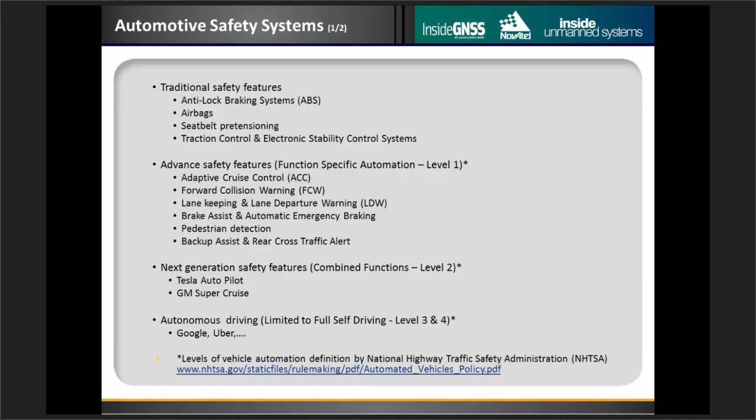And then, of course, we have other autonomous driving tests and development programs going on, like Google, Uber, and these are more limited or fully self-driving automation features, or level 3 and 4. And you will hear about these in more detail later in the presentation today.

So the other aspect I want to touch upon for safety is there's convenience and safety applications that are connectivity based. So examples would be GM OnStar, Ford Sync, Toyota Safety Connect, and then Chrysler Uconnect, and pretty much all the OEMs out there have a connectivity based solution, safety and a convenience application. These are basically location-aware connectivity applications. So they have a GNSS receiver that will bring in position and time, and then of course cellular for connectivity, as well as a backup source for time.

And typically these systems integrate different sensors in the car. And in terms of applications that we see in these, there's standard navigation, diagnostic, prognostic functions, and maintenance functions, concierge services, and more importantly, emergency response functions. For example, if the car is involved in a crash that triggers airbags or severity that can be detected by sensors, the car can potentially generate a call, and that will go to an emergency response team with specific location and impact information.

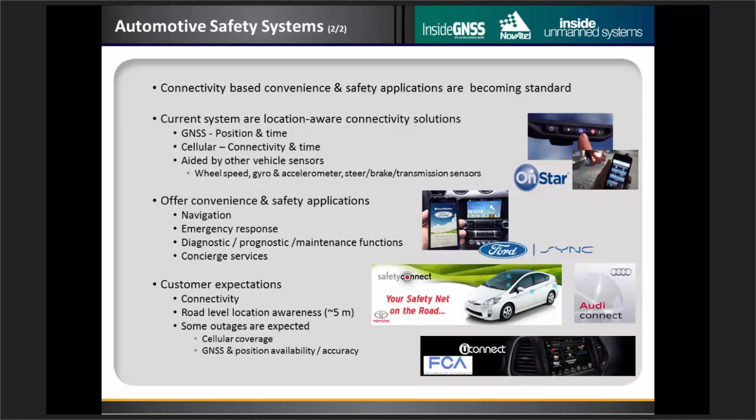And from a customer's perspective, generally the expectation is there'll be connectivity all the time, and the device, the car, will know where it is in terms of what we call road level accuracy, or which road it is on. Of course, there are some limitations, generally understood limitations, cellular and GNSS coverage-based limitations.

And these, along with other sensors and actuators, are connected to each other using what we call the CAN network, or controller area network. The idea is that each ECU or a sensor can put information into that network, and other ECUs or other processes can pick it up and act upon it. So like I said, a telematic system will basically take information out of CAN, do some processing, and do what it has to do to control maybe interface functions or various other indicators on the cluster and so on.

The connectivity device is pretty much, again, standard in modern day cars. That's a standard 4G, 3G cellular modem, and that's the gateway to outside connectivity. And so this may be a part of a telematic system.

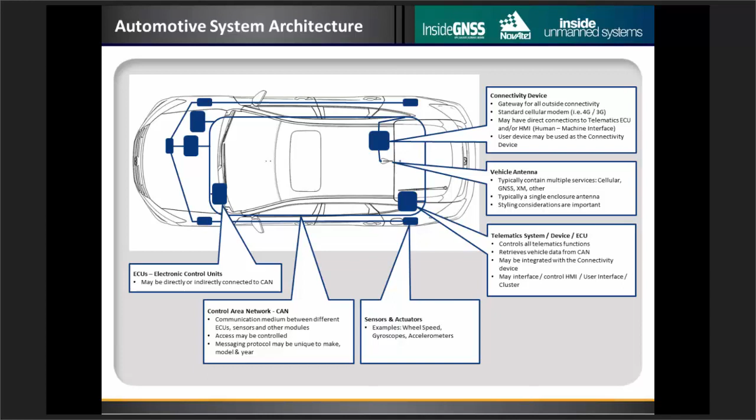This could be a separate thing. And another important aspect of this architecture is a vehicle antenna. And typically, we see multi-service antennas, meaning cellular, GNSS, XM, all of these different connectivity mediums have their antennas co-located in a single enclosure, primarily driven by styling, complexity considerations for the car platform. So this is something that you can see in most cars, or sometimes we refer to as a shark fin antenna. And this is something we will talk about in more detail later on.

So in terms of challenges, the number one thing I see is whenever there's a new technology that comes in, generally that's added to existing systems as an add-on. A good example that I'm going to talk a little bit more about is V2X, or connected vehicle technology. So oftentimes there's no complete redesign of an existing car design. Instead, it will be added on. Now, obviously, for safety critical systems, there will be some redesigning needed, and good examples would be antenna, as I mentioned before. The size of the antenna, shape of the antenna, placement may need to be changed for better availability, better reliability, and so on.

And of course, same goes for sensors. There's wheel speed sensors, gyroscopes, stability control sensors in a car platform today, and some of these may need to be upgraded, or maybe to have dedicated sensors for these automated safety critical functions. And if you look at current systems, specifically for GNSS, there's no requirements around reliability, integrity, or jamming resistance today. So those are things that we need to consider. And another aspect that I see as unique for automotive is that styling, cost, and complexity are very important.

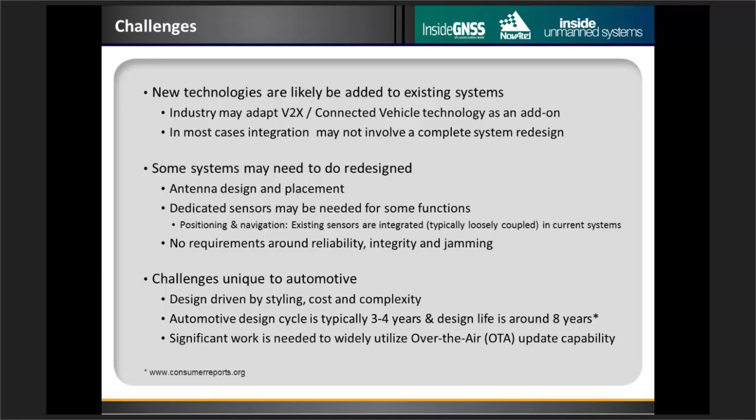So when we look at the GNSS technology alone, I think the industry expectation is changing, and that needs to be changed. And the reason I'm saying that is, if you look at legacy systems, we were looking at the ability to say, which road am I in? I'm happy with around 5-meter accuracy. And then with these lane-level applications, for example, lane guidance, or V2X or connected vehicles, you will need even further, better accuracy. So these will require additional sensors. So if you take the Super Cruise or autopilot examples, cameras, radars are used, and maybe even GNSS with corrections and maps may be used. So these technologies are coming in now.

And then when we get to the beyond scenario, you will need even better accuracy. And then sensor integration, I think, will be the way to do that: multiple sensors. It could be multiple technologies in the car. But one thing I wanted to point out is today GNSS still remains the only viable absolute positioning and timing source. So that still remains, especially timing, which is an important aspect as well.

And I think the industry needs to see that we are going from accuracy of several meters to applications that will require centimeter level accuracy. From availability point of view, most of the time availability was good enough, and with safety critical systems you will need it all the time. In terms of reliability, failure detection is very critical, as we hear about later.

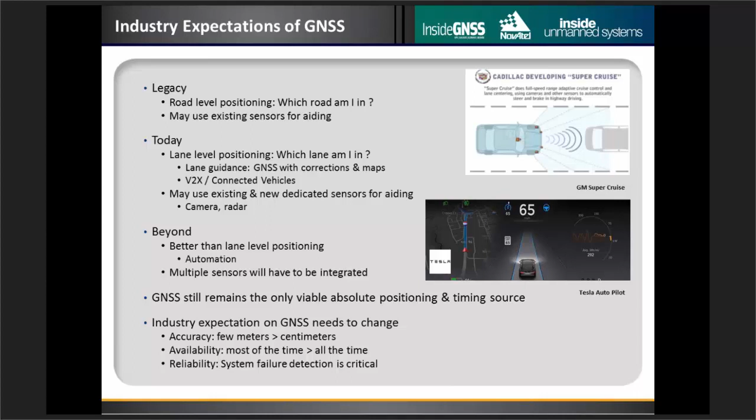Your radar, your cameras can see what signal phase you're facing, but that doesn't give you enough information to predict what's going to happen in 4 seconds when you get to the intersection. So you need some intelligence there, and often traffic controls are adaptive, meaning responsive to vehicles, so it's not predetermined.

So connectivity or connected vehicle technology enables this information sharing. That's a key piece there, and it can address other sensor limitations like the ones I listed before. And there's a significant amount of research that has happened since 1999, when FCC allocated this frequency band for safety use in North America, and there's similar allocations in other regions in the world. And this technology is typically called dedicated short-range communications, or DSRC.

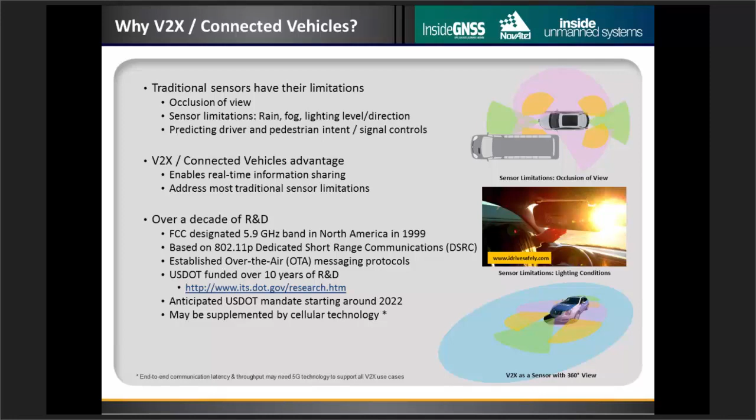So very basic information about V2X. So the idea is all the vehicles and pedestrians, everything will broadcast information about where they are. So vehicles will broadcast what's called a basic safety message, or a BSM. Pedestrians will broadcast a similar message, and then traffic control devices will broadcast signal phase timing information, maps and corrections, and so on.

So the idea is any given vehicle will be able to hear from others, classify where the other vehicles are, where the other pedestrians are, and then identify threats and generate warnings further down the road, generate control responses when we get to that level.

Typically, when you look at research literature and so on from the industry, you will see these accuracy levels: road level, meaning better than 5 meter absolute accuracy; lane level, better than 1.5 meter absolute accuracy. So the idea is a given car should be able to classify other objects to different awareness zones and identify threats.

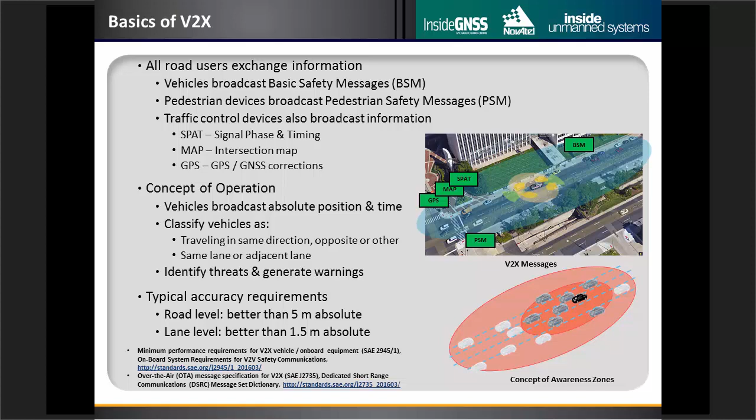So a quick overview of the over-the-air messages, the basic safety message. So the idea is send this message every 100 milliseconds, use GPS time or UTC time, time mark, and then include position information, motion, heading, control status, and so on. And then there's provisions to attach additional data.

For example, GNSS data can be attached in RTCM format as optional data. And these are all defined in the Society of Automotive Engineers J2735 message set.

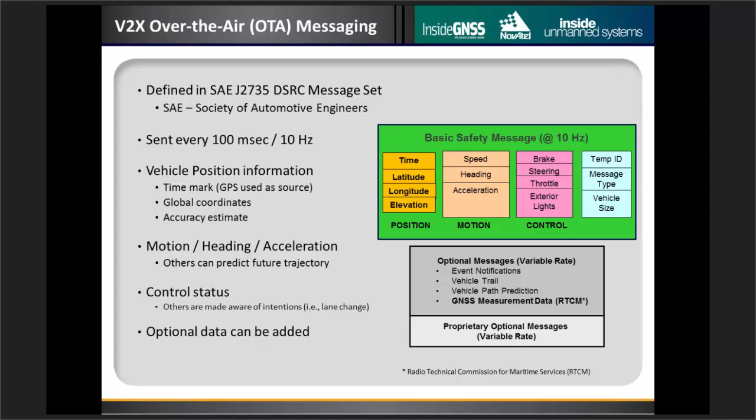So here's an overview of the system that we've developed and demonstrate at Renesas Electronics. And you can see one of our cars. We got a fleet of 3 vehicles equipped like that, and they have sensors, traditional sensors, radars, lidars, cameras, as well as V2X technology.

So this shows the engineering interface we present inside these vehicles, and what you can see there is input from radar, lidar, and then target classification information. And down here you can see a warning. That's a forward collision warning generated by V2X for the car that you can see in the front.

So with our software partners, we enable various applications. We demonstrate various applications. And what we typically do is we have portable units that we can plug into any car, and we have DSRC enabled roadside equipment or traffic control devices. And the green arrows you see here are DSRC communication lines, so we can demonstrate how vehicles can talk to each other, and then vehicles can share information from traffic control devices.

We also have the ability to have a back-end reporting system, so almost in real time we can enable a user device to show what's happening in the field. We also have the ability to, through a validated interface, put warning information. So for example, construction zone warning or hazard zone warning or speed warnings we can put in through our backend system, and that can be uploaded to a roadside unit or a traffic control device, and vehicles traveling in that region of interest will get these messages, and they will display the appropriate warnings.

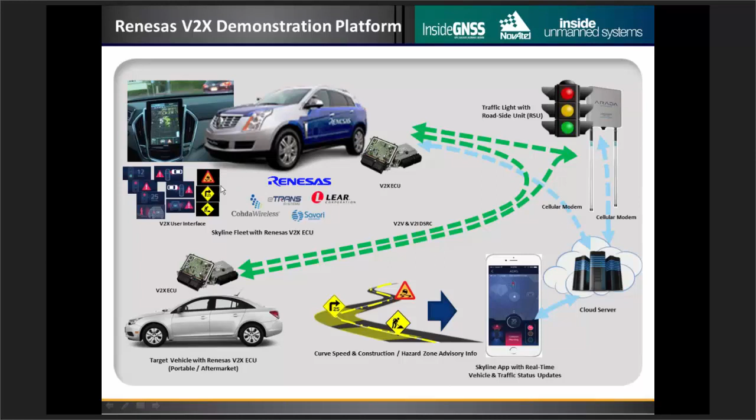So finally, I would like to finish off with kind of a challenge for the GNSS industry. So all of these connected vehicle programs are heading into their next phase. Connected vehicle pilot programs sponsored by DOT starting next year. There will be sites in New York, Wyoming, Florida, among other similar sites. And this is the first exposure of V2X to deep urban canyons in a real environment.

All right, so back to you, Mark. Great, thanks a lot, Chaminda. It's obviously a very complicated and involved situation that we're trying to deal with here. I think you've done a pretty good job of capturing the key points.

I'd like to move ahead now to our second presenter, Dr. Mathieu Joerger, who is an assistant professor of aerospace mechanical engineering at the University of Arizona. His background is that he has a master's in mechatronics from the National Institute of Applied Science in Strasbourg, France, as well as a master and PhD in mechanical and aerospace engineering from the Illinois Institute of Technology. He brings a wealth of experience to the panel today in the GNSS navigation and integrity field.

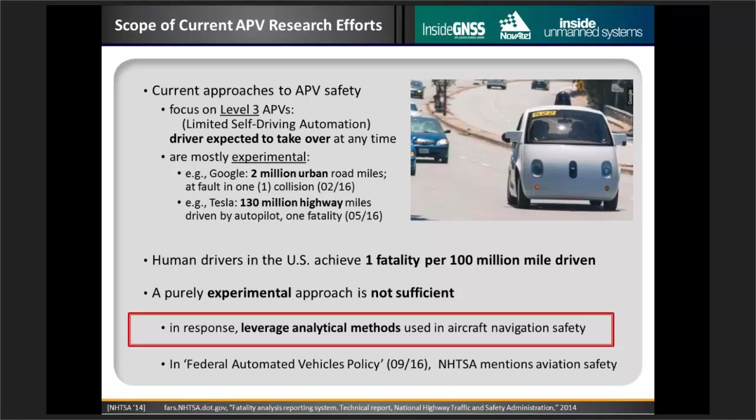And we can push this argument further to say that a purely experimental approach is really not sufficient, certainly not if we're trying to achieve level 4 autonomy. In response, what we could do as a community is to leverage the analytical methods that have been used for decades in aircraft navigation safety. And this idea was mentioned in September of this year by NHTSA in the Federal Automated Vehicles Policy.

So when we talk about aviation safety, how do we evaluate safety? Well, if we have an aircraft during an approach, this aircraft will try to predict its position close to the touchdown point, and it wants its position estimated to be within an alert limit requirement box. In fact, the probability of being outside of that predefined box is what we will call later the integrity risk

or safety risk. If we want to translate that or convert it into the car problem, the autonomous car navigation problem, then we can draw a box that is pretty much limited by the width of a lane. So the first thing that is striking when we look at this is simply comparing the size of the boxes. It took decades of research and considerable resources in the aviation community to reduce the size of that box to a few tens of meters, approximately 50 meters for the wide area augmentation system.

That is a GPS augmentation system that was designed by the Federal Aviation Administration. And in the best cases, you can bring it down to plus or minus 10 meters around the aircraft. Of course, that's an order of magnitude larger than what we need for a car. So it's a task of epic proportion, and there are adjustments to be made if we want to convert these requirements used in aviation to the autonomous car problem.

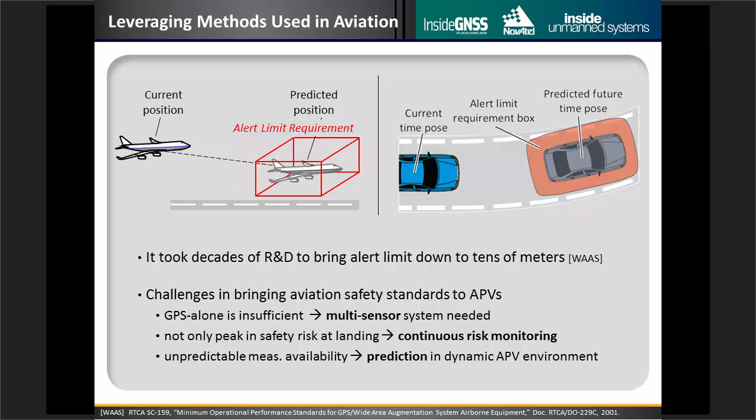If we want to make a full safety case, we consider 4 safety criteria. The first one is accuracy, and that's typically a 95% requirement. So if you take a few hundreds of data points, you can prove your accuracy. In contrast, integrity is a measure of trust in the sensor information, and the most stringent requirements we have in aviation are on the order of 1 minus 1 in a billion. So that's much more stringent.

That also means that now rarely occurring events that impact the tails of the distribution have to be taken into account. For example, GPS satellites are specified to have failures approximately 3 times per year. So we have to do something against that, and what we do is we detect these faults. But what is more challenging is to take into account the impact of undetected faults. That's what makes the integrity risk evaluation challenging.

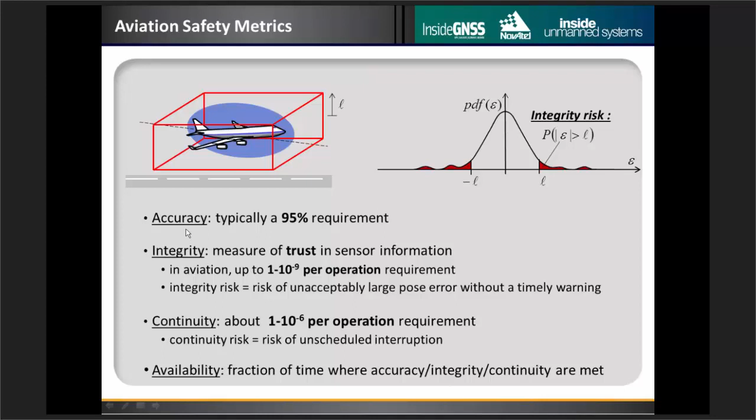Then we have the continuity. The continuity risk is the risk of unscheduled interruptions. For example, we want to avoid occurrences of false alarms. So this is something I will talk about later again. And finally, we have availability, which is the fraction of time where we have accuracy, integrity, and continuity.

And we believe that design for safety will accelerate the development of autonomous cars. Back to you, Mark. Great, thanks a lot, Matthew. Again, I think an excellent summary of the overall challenges. And for those in the audience, just an FYI, Matthew will be continuing on with a few more details.

But first, we are going to start our first Q&A session. So we've been getting some good questions from the audience, and I encourage you all to continue sending those in as we go along. I'm going to direct our first question to the one panelist we haven't heard from yet, Jonathan Auld from NovAtel. Jonathan, the question is about antenna placement and size on current vehicles, and how does that compare with what you need as a GNSS receiver provider?

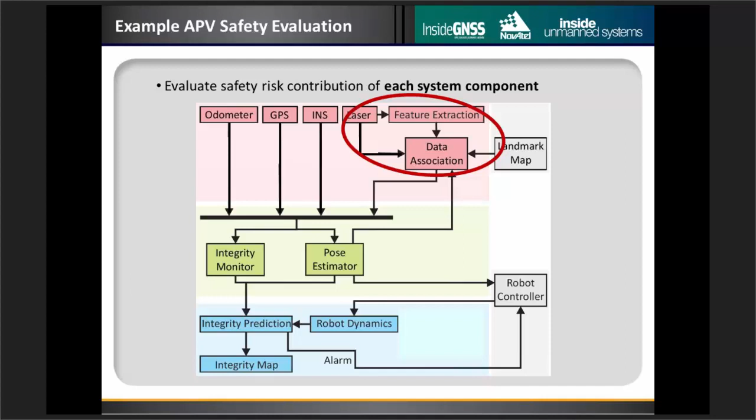All right, so I'm starting again where I left off with a diagram of the navigation system for an autonomous car, and I'm going to give you an example to illustrate how we can implement these integrity and continuity risk requirements. To do that, I'm going to talk about laser-based navigation, because it's pretty much an unexplored area in terms of integrity and continuity, the way we've been implementing it in aviation. And John will talk later about the GNSS part. Okay, so if we look at laser data, you basically have a cloud of points, and each one of these points individually does not really give you much information.

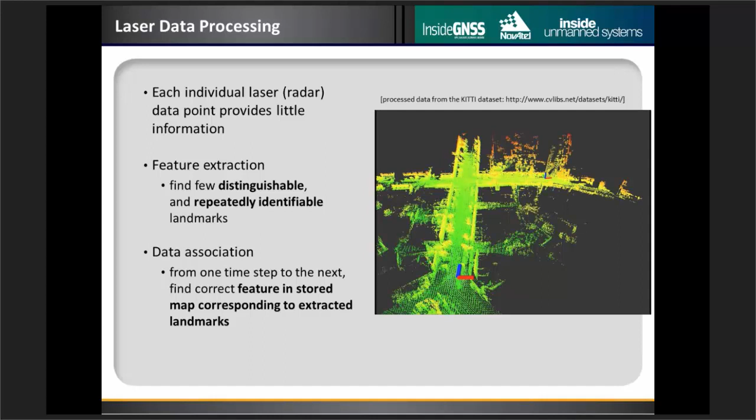In fact, you have to first group the information to extract features, and then you have to associate these extracted features with landmarks that you have in your map or that you have observed previously if you're using a simultaneous localization and mapping or SLAM type algorithm.

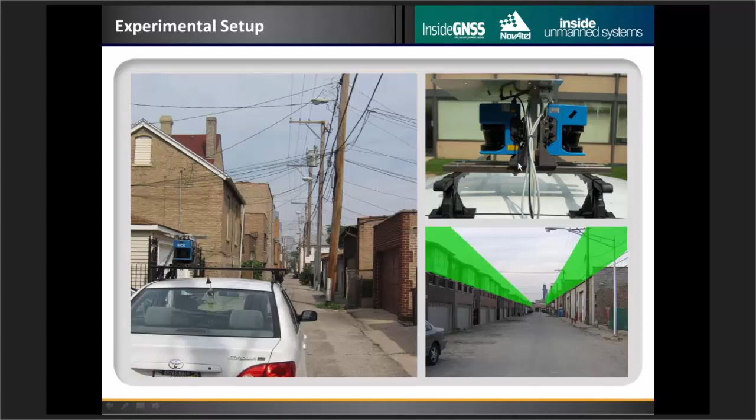So to better explain the issue that you have to deal with in data association, I'm going to show you some experimental data that I collected by mounting 2 laser scanners back to back, so that I had a 360-degree view of the environment, and I put a GPS antenna on top to get some ground truth trajectory. And I drove that into the streets of Chicago.

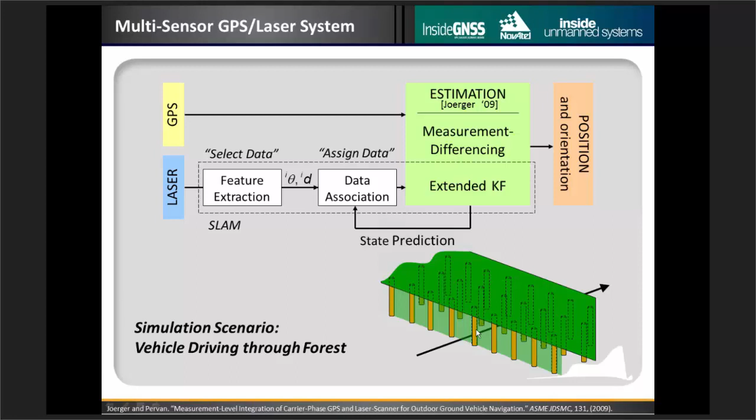The simulation scenario, again, a simplistic scenario of a vehicle driving through a forest-type environment. GPS won't be available under the trees, and we'll use tree trunks as landmarks to navigate using the laser. So I will show you a movie of a vehicle going across that GPS obstruction, starting in a GPS available area in yellow, going through that transitional GPS and laser available area in green, and then we'll use laser only, laser beams to these landmarks, those tree trunks if you want, and we'll go out of the obstruction.

You will see these covariance envelopes, or these covariance ellipses in red for the vehicle. They represent the positioning error, so this will change as the vehicle moves. And we also have covariance ellipses on the landmarks. Again, this is an implementation of SLAM. We don't know a priori the position of the landmarks, so we have to estimate them together with the vehicle position.

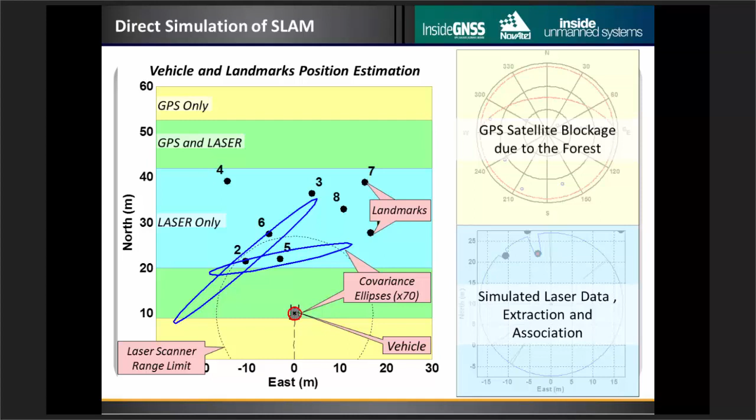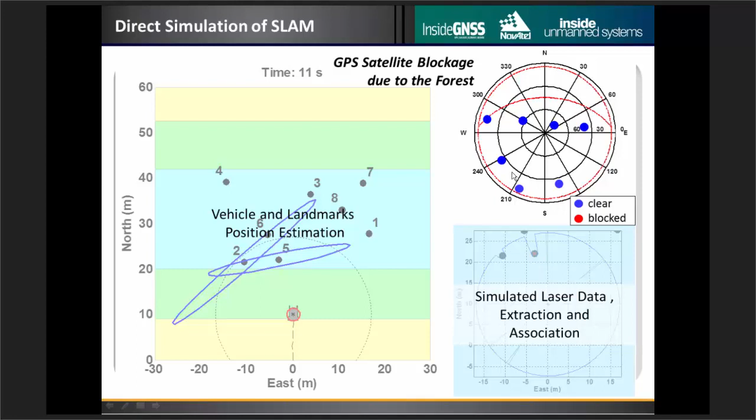In the upper right-hand side chart, you can see the GPS satellites. This is a sky view of the satellites. So GPS satellites that are available are in blue. The tree canopy, as the vehicle moves, will slowly cover the antenna so that all these satellites will be indicated in red. They will be blocked. And in the bottom right chart, you have a simulation of the laser data with some noisy measurements that are filtered out.

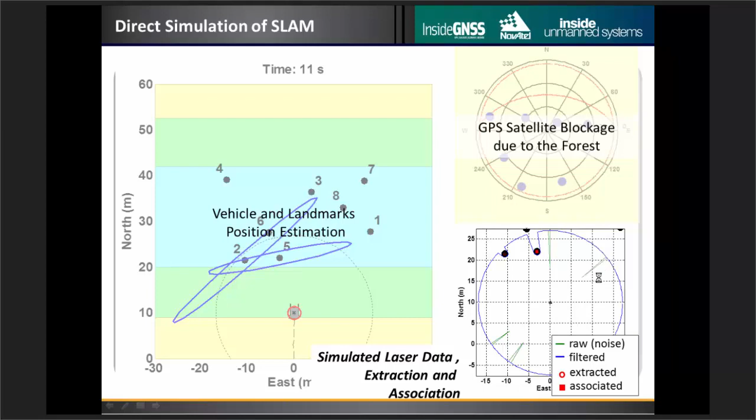So here you see how this algorithm works. You can focus on the covariance and the covariance ellipses. The red ellipse for the vehicle changes seamlessly as we use GPS and then laser. And the point I'm trying to make here is that, as is well known in the robotics community, this covariance ellipse does not capture all the positioning error because we have some nonlinearities and we have this issue of incorrect associations that may occur.

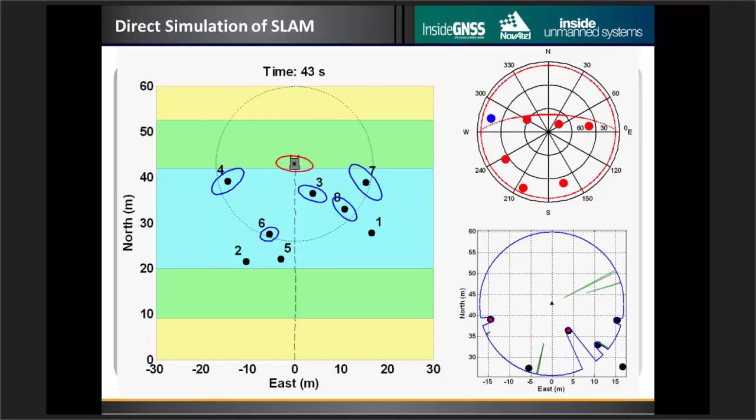So because of that, if we look at the actual positioning error versus the travel distance as the vehicle moves across the obstruction, that actual error does not match the 1 sigma covariance envelope. So the thick line is outside of the thin line boundary. If we represent the risk that is derived from the covariance, you can see that it's pretty low. That's the black line right here. It's below 10 to the minus 5.

However, if we represent the integrity risk or the integrity risk bound that we derived to take into account the risk of incorrect associations, that risk is much higher. In fact, we have a sudden increase at travel distance 20 or 21 meters.

Going back to our top view representation of the vehicle and the landmarks, at that travel distance 20 or 21 meters, landmark number 6 is hidden behind landmark number 5. And it's going to come into view of the laser for the first time at that travel distance.

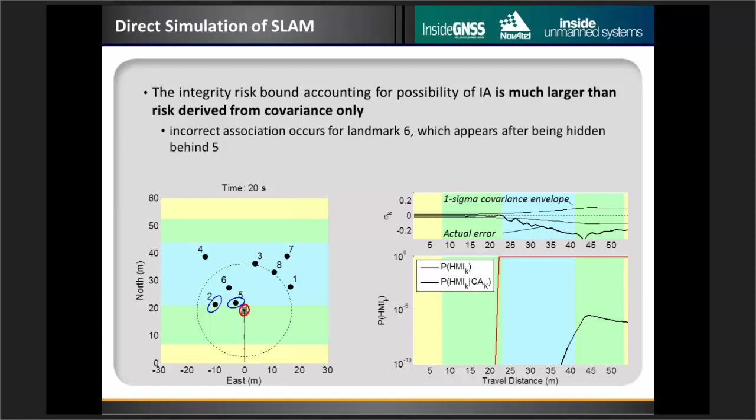And the algorithm will have a risk of confusing landmark number 6 for landmark number 5. And this is what is captured here in that sudden increase in the risk. So we can do something against that. We can choose not to use landmark number 6 because the risk of misassociation is too high. So let's do that. We remove landmark number 6, we don't use it.

And now our position error pretty much matches the covariance envelope. So that's a good indication. If we look at the integrity risk, it's much lower than it was before. But we still have a sudden increase here at travel distance 23 meters. Going back to our top view of the vehicle and landmarks, we can see that now landmark number 2 is hidden behind landmark number 5.

So you may think, okay, why not remove landmark number 2? Let's not use landmark number 2. Well, the problem is you cannot just keep removing landmarks, or at some point you won't have a position solution anymore. You won't be able to continue your navigation. That's an issue of continuity risk. So we have pointed out here a key trade-off between integrity and continuity risk.

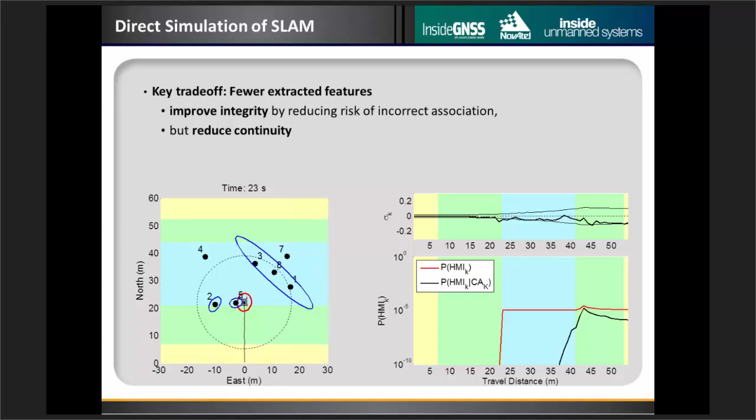Yes, removing landmarks will reduce your risk of incorrect association, but it will also increase your risk of not being able to continue the mission. This is a key point that we'll have to take into account when designing algorithms for autonomous cars.

In summary, the major challenges that we've gone through here is that in order to bring aviation safety standards to autonomous cars, we'll have to establish safety evaluation methods for laser, radar, and camera-based navigation. We'll have to do that for multi-sensor systems, and we'll have to design integrity monitors. And then we'll have to predict that integrity in a dynamic environment.

If we achieve this using an analytical solution, we'll have a way to set safety requirements on individual sensors. Design for safety will accelerate the development of APVs. And with these metrics of integrity and continuity, we'll have sensor-independent and platform-independent certification metrics. And that concludes my talk.

Back to you, Mark. Excellent. Thanks a lot, Matthew. So hopefully the audience has gained a real appreciation for the real challenges here. Obviously, you've demonstrated some great initial results, but you've also highlighted the need for a lot more work going forward.

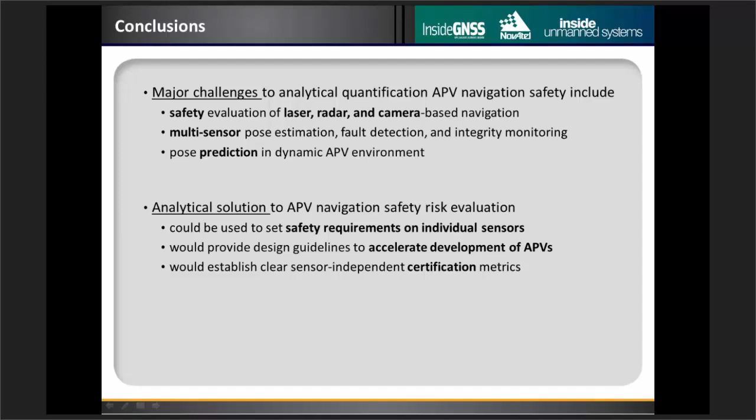I'd like to take this opportunity to formally introduce our final panelist today, Mr. Jonathan Auld. Jonathan holds a BSc and an MEng degree in geomatics engineering from the University of Calgary. He has over 20 years of experience in the GNSS industry, working with seismic surveys initially, and then in 1998 he joined the NovAtel team, where he has held various positions in the aerospace team and commercial development teams. He was the director of technology development and led the core GNSS receiver development team.

He was the director of portfolio management, and most recently he has taken on the, I think, very formidable challenge of leading the business and technical efforts to transition their technology to safety critical markets, and obviously that's the main reason why he's here today. So he's going to give the GNSS manufacturer's perspective on this particular topic. Jonathan, the floor is yours.

Thanks, Mark. The topic here is going to be what is the industry manufacturer perspective, or at least NovAtel's perspective, on how we're going to move into this safety critical world with our GNSS solution. So just a summary, NovAtel is a manufacturer of high precision industrial grade GNSS solutions. We have applications in a number of different markets all over the world, and we've been doing this for over 20 years.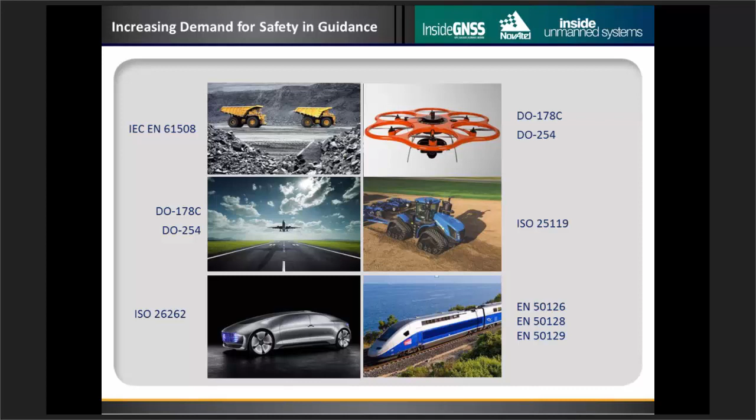So autonomous mining, autonomous agriculture, the UAV explosion all over the world of all these unmanned vehicles that people want to use, and then railroad, and then of course the foundation where a lot of the safety concepts came from was the aviation world, where we've played a role in participating in the WAAS program that Matthew had mentioned before.

The autonomous vehicle application is going to expect 100% availability in all conditions and locations. 100% is a difficult thing to get to, but if we're thinking about where this is going to go, people are going to want their vehicles to drive in all conditions, rural, urban areas, all weather, all visibility. All these different sensors that have to work together have their various trade-offs as to where they work better and where they work worse. And so we believe the overall solution, as was mentioned previously, is going to be a sensor fusion solution with GNSS playing a critical role, but likely not the sole positioning source in this type of application.

GNSS also plays a role in providing an excellent source of time alignment for all these sensors. And so from our perspective, we see the GNSS sensor as the core of this, where we can provide an absolute solution and a timing source to other sensors in the vehicle.

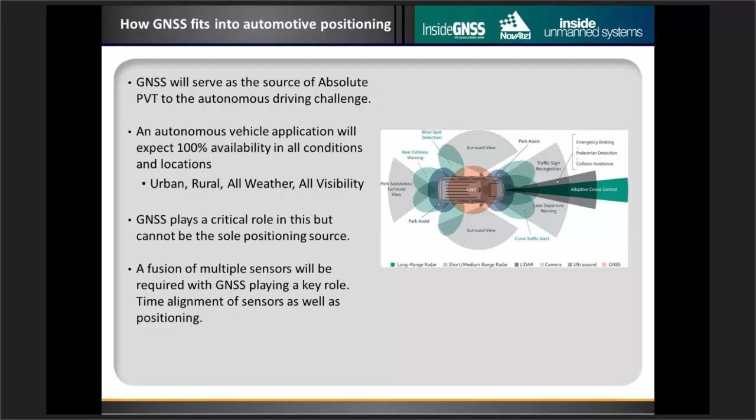So today, GNSS is in the automotive world, obviously. The primary use case is driving the navigation systems that are on the vehicle for point-to-point navigation and finding out routes that you can drive the vehicle through or to. These receivers are single frequency, supporting one or two constellations, tend to be accurate only to the meter level, as was mentioned previously, and have fairly low data rate outputs.

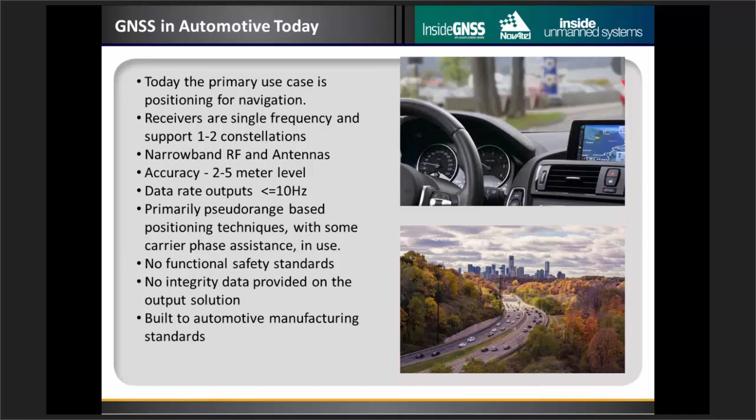The solution type that is used in these cases is primarily a pseudo-range-based solution with some carrier phase assistance for dead reckoning and those kinds of things. But there's no requirement for any sort of functional safety standard. The GNSS isn't serving part of any system on the car that is going to have a safety of life impact. So there's no integrity data provided in the output solution. A lot of the receivers that are used, however, are built to automotive manufacturing standards.

So the next bit here, this is just a very high-level summary of what type of solution is going to be required in this application. As was mentioned previously, it's not going to be adequate to have 5 meters of accuracy. We need to have that sort of 1 meter almost all the time kind of accuracy, and we need that in a three-dimensional sense, if the car is driving itself, to deal with overpasses, underpasses, these kinds of things.

That will drive a move towards multi-frequency and multi-constellation receivers and antennas. Moving to that type of solution improves the overall accuracy, increases the number of measurements and the availability of the measurements, and will help in speeding up the convergence time of the high precision solution, which I'll talk about in

the next slide. We see achieving that 1 meter 3 sigma solution as requiring a correction source like a PPP, precise point positioning service, that is available today through our Veripos sister company. They deliver those corrections over satellite and over the internet.

And from our work so far in this, the rollout of this technology, as you saw with the Tesla use case, will primarily focus on highways and freeway applications, exit-to-exit kind of applications, with a transition to urban environments where some of the error sources need more research as to how we're going to manage them and how we're going to handle these sensor fusion challenges.

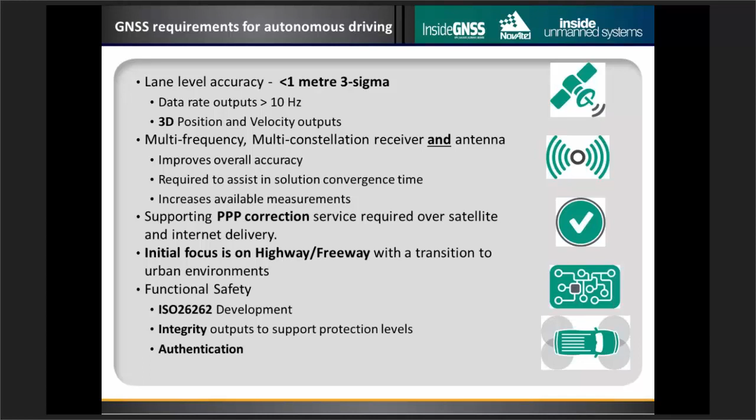So on the positioning technology side, if we're going to have, in the ideal case, this sort of 1 meter all the time type of solution, we're going to need some sort of decimeter level, or 5 to 10 centimeter level at the 1 sigma level to provide that. And so we believe that's the type of positioning that a PPP level of service can get to. It obviously does that today.

The RTK solution that is out there is certainly more accurate, but it's not necessary at this point. If we're only trying to keep the solution inside the lane level, then PPP should be available, and PPP's infrastructure costs are lower, and we have availability over satellite for rural areas and potentially over cellular or internet connections in urban areas. So there's some backup there.

So one of the challenges that is discussed quite a bit is that PPP is great, except there's this convergence time challenge that it currently takes tens of minutes for the solution to get down into that 5 to 10 centimeter level. And that is true, but there's a number of companies, NovAtel included, working to resolve that, and we expect that in the next few years that limitation will be largely removed.

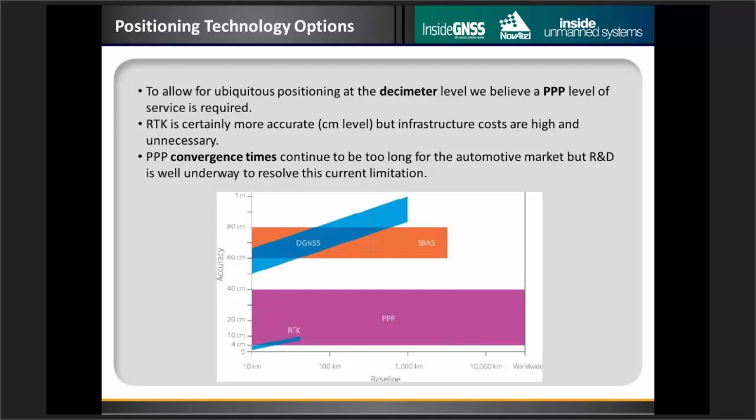So the similar concepts to what Matthew was talking about are critical in how we're going to solve this problem. These concepts of integrity, continuity, accuracy, and availability have to be balanced and understood in an automotive use case. If we're now on the ground and we have objects above us, overpasses, vehicles driving beside us, dealing with threat models like multipath is completely different and much more challenging from an automotive perspective than from an aviation perspective.

And so these concepts will have to be extended into the ground applications such that at the most basic level, the receiver cannot provide a misleading set of information. So if the receiver is providing a good solution, it needs to be trustworthy enough to say, yes, here's your answer, and it is good, and you can trust me to a given integrity risk level.

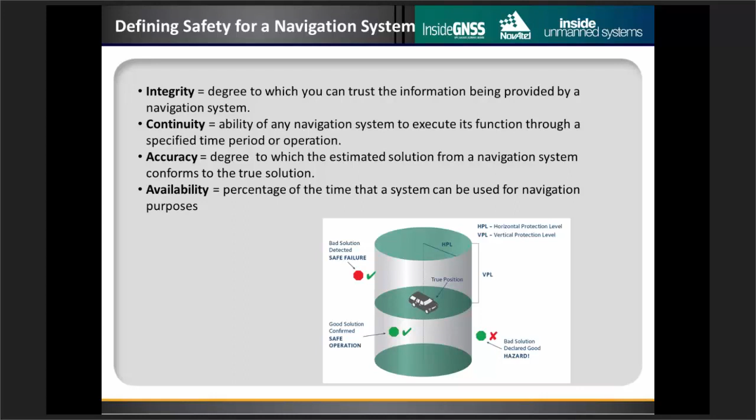And if it is not able to provide that solution, it needs to be able to provide that information as well. What you don't want to have is the receiver's output providing an indication that it is good and trustworthy when it is not. And that's a lot of the work that is going to be required to figure out how to do this in the ground application.

So underpinning all of that is that, like I said earlier, you have to design safety and reliability in from the ground up. It's not the case where you can just take a product and test it to these levels of integrity risk, as Matthew had mentioned. We need to design the systems, do a whole system level safety case to determine what level of reliability the GNSS receiver needs to serve as part of an overall system.

So in a lot of these cases, what happens is the overall system, the autonomous vehicle system, is declared to have a certain failure or integrity risk, I guess you could say, and then that is broken down depending on who's designing the system into how each subcomponent, be they cameras, inertial sensors, radars, lidars, GNSS, all those fulfill that ultimate integrity risk.

And so the industry has, in the aviation case, these design standards of DO-178 and DO-254, where depending on the criticality of that system, you need to design it and have an engineering process around it that delivers the artifacts that shows that you have designed the system to that level of safety and you can prove it.

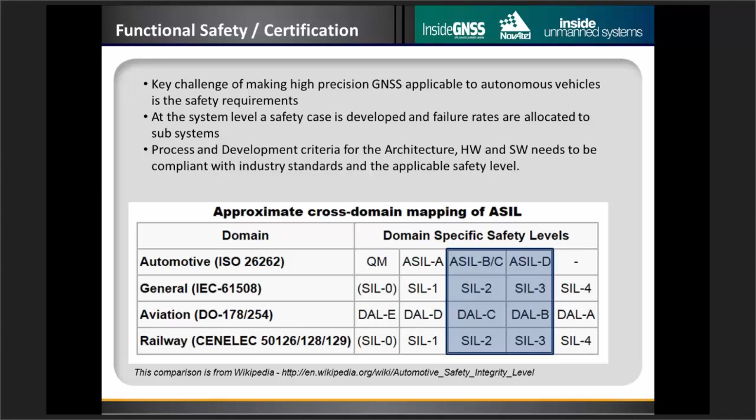So we've done some testing in our system already where we're just trying to see where are we at right now. And so at a 2-meter protection limit using a PPP solution, and this is data that's about 4,000 or 5,000 kilometers of driving, we're at a 90% availability level. So there's still some work to do if this is going to provide a higher availability level such that it's practically useful in the real use case.

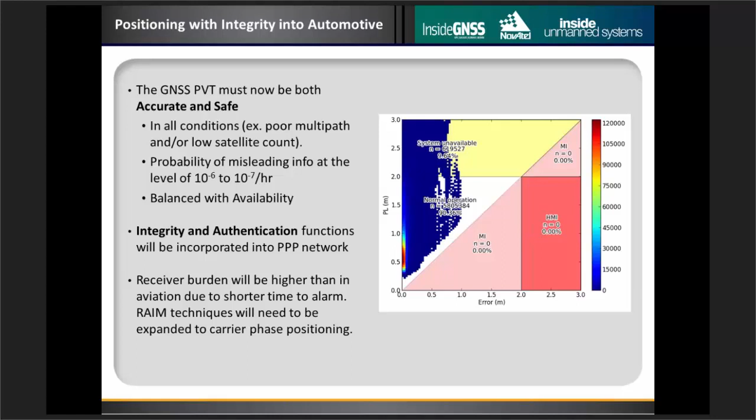Matthew had talked about that a bit earlier, that the RAIM concepts will have to be extended into this carrier phase area for a PPP solution such that we can detect at the receiver level whether or not we have misleading information and take appropriate action. The network will also serve a purpose in there, and the work we need to do is to figure out what that right balance is as to where those have to go.

The additional challenge, of course, is the automotive world has significantly higher volumes and significantly lower cost expectations. And so high precision right now is not currently available in that cost structure, and there's a lot of work to do to bring those solutions in at the cost and volume levels that the automotive industry is expecting.

And we also need to look at the correction network and figure out how we're going to design safety in from the ground up. And while doing that, we also need to accelerate the time of convergence. So you can see that this is not just a simple problem that we're faced with, and NovAtel's got a team working on this day in and day out right now. So I think that's my last slide, so I'll go back over to you, Mark.